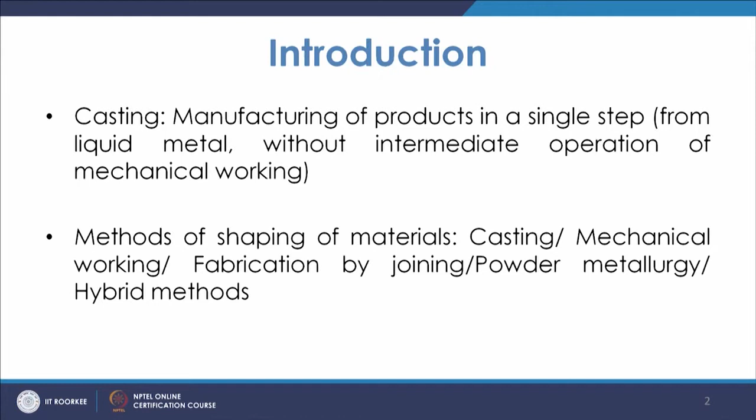So coming to the definition of casting: basically casting is defined as the manufacturing of products in a single step from liquid metal without intermediate operation of mechanical working. So let us see why casting is so much important.

There are many kinds of shaping methods of materials available. Why is shaping required? As we know, as an engineer we are required to exploit the available raw material of nature which nature has supplied to us. We are going to exploit these raw materials and get something in a form which is going to satisfy our needs.

That is the role of an engineer, and for that, as we know, we have different principles based on science and mathematics. So we use those principles, we have other resources, and based on that we shape the material.

Most of the natural materials we have in terms of reserves, we have mineral deposits. We take these mineral deposits, but they cannot be used directly. As you know, all the items are buried, and they are in certain other forms, so they are to be extracted. You have to extract from it the material which you need.

So that is how you extract the metal. You have the iron ore, you extract and process it to get the pure iron. Once you have the iron ore and convert it to iron, during the conversion you will have to see that you can shape it.

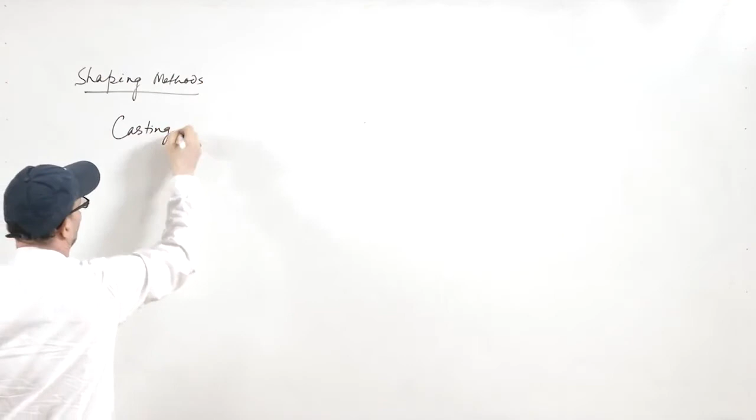We have discussed this a little, but as we know, in casting you have the cavity which is to be filled by the liquid metal. Once this liquid metal in the cavity gets solidified, because energy was given to convert it from solid to liquid state, and then that energy is extracted, it goes back into its solid state. So directly you get the final product.

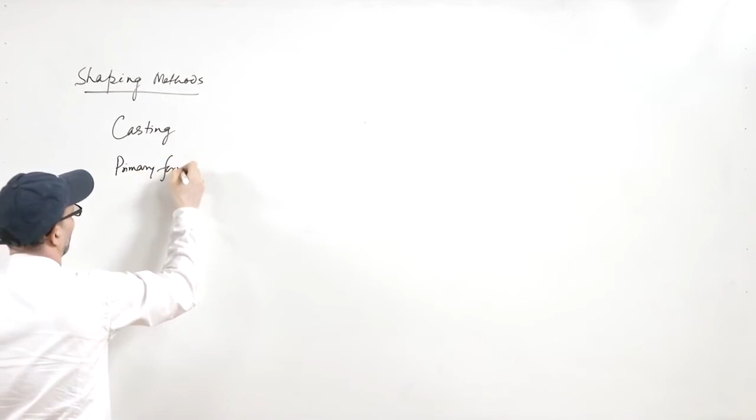Now other methods, like primary forming processes, or forming processes, mechanical working, primary or secondary forming. In that, what we do is apply pressure or force to deform the object. For that you need an object, and that object must have a certain shape, so you may have any object in any shape.

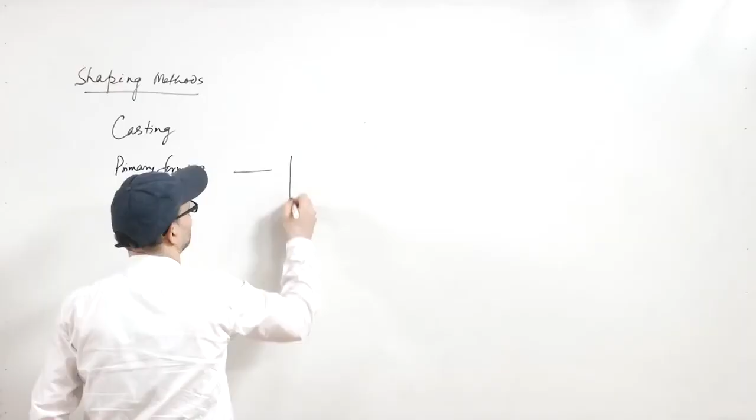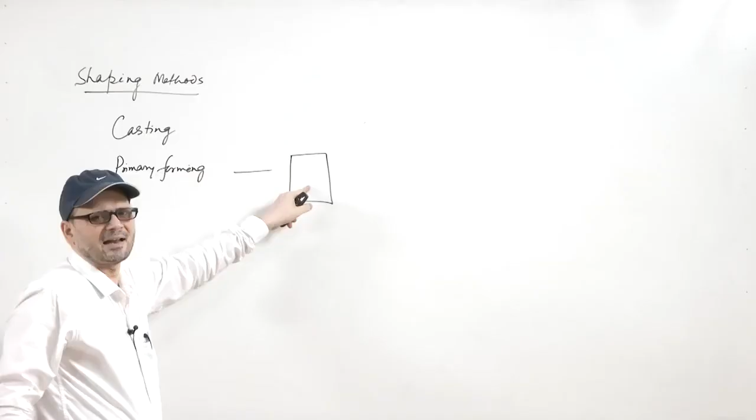Now, this shape you can't get as per your will, so you will have to make it, and that you make by casting. So once you cast, you bring that stock material and go for further forming it. You can form it and make it into this shape.

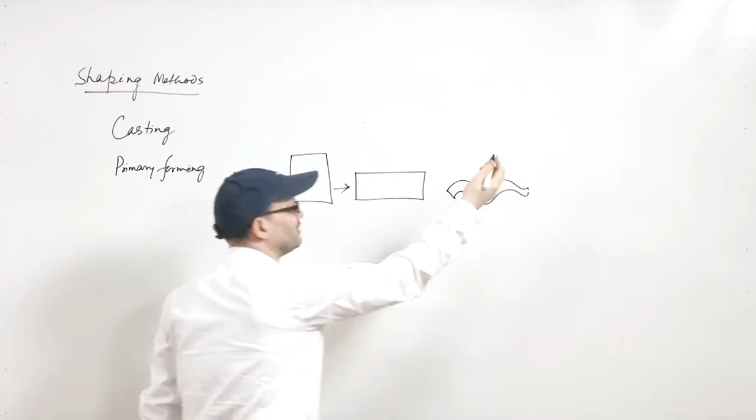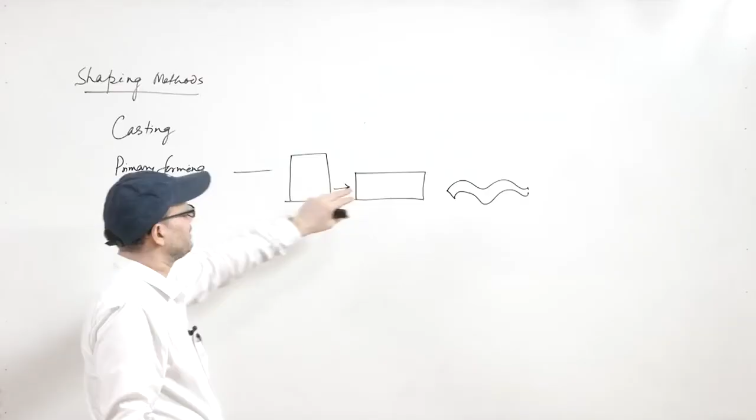You can have different kinds of dies, different kinds of rolls, and you can apply pressure on it to make any shape of material. So depending upon the type of forces applied and the type of equipment used, you can have different kinds of products - flat products, hollow products, bars, wires, all that. That comes under forming, primary or secondary forming processes.

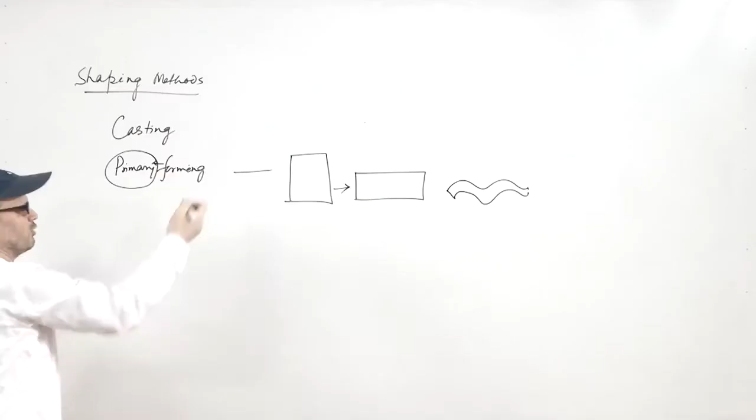So you can have it as the forming processes basically, or mechanical working processes. Then comes fabrication or joining.

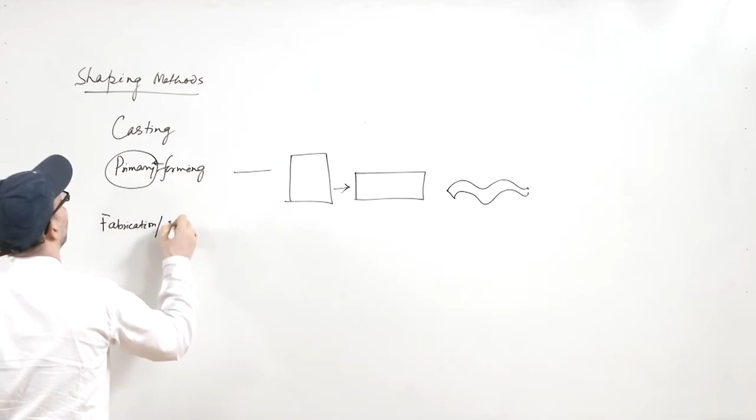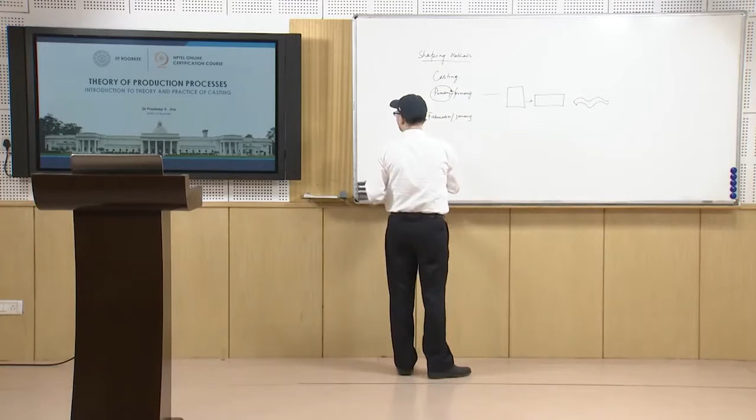Now fabrication or joining is also a method of fabrication, fabrication by joining basically. Normally whenever we talk about the fabrication term, we commonly refer to joining. Now, joining is, as we know, that you have to join the components - you have two components and a certain part is to be joined.

Now these things are required when you feel that the whole component cannot be manufactured in a single run. Although there are different methods of joining, just like in forming you require a stock, similarly in welding or joining also you need a stock or material in a certain shape which is to be joined. For that you need some cast unit or some forged unit, so ultimately you need a material which is to be cast. Then comes powder metallurgy.

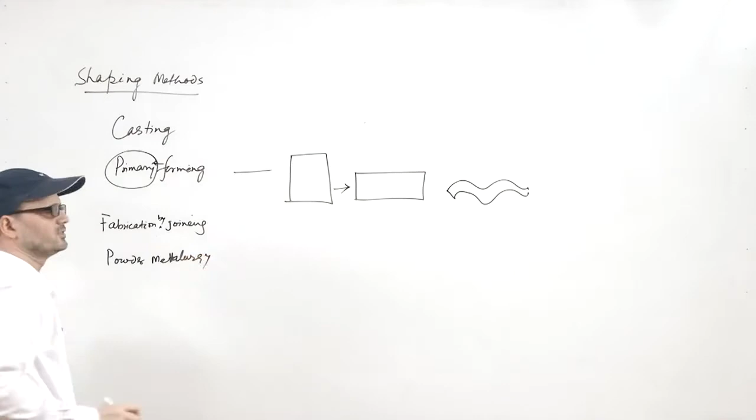Now, powder metallurgy is a new method, or a good method, where you use these powders. Powders of different materials can be used. Because of the requirements of varied nature, nowadays many times the material should have many types of properties. We should have good lubricating properties, very good porosity, and good strength.

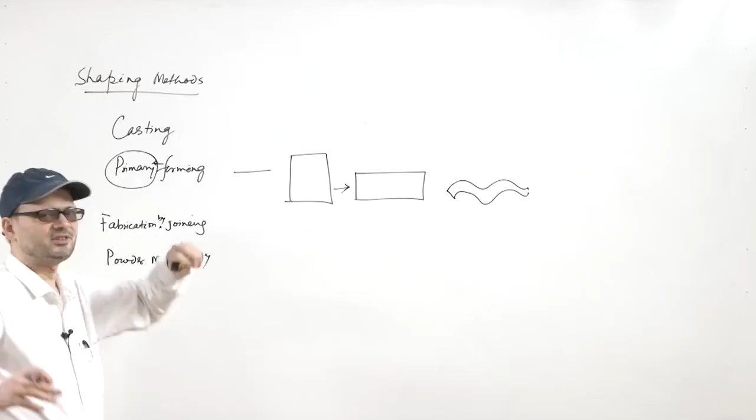So all these properties. Now, in casting basically you are melting the material first. While melting, you will have to see that the materials being melted are normally of comparable melting points, but many times they should also have the gelling tendency with each other, they should mix with each other at the microstructure level.

Many times that is not possible. You may think of having a material where you should have metal as well as ceramics. That is not possible when you melt. When you melt, the ceramics will be different, and the casting itself will be difficult, because once you cast you cannot ensure the homogeneity of these ceramic particles throughout the container or the mold. So these are the challenges which are to be faced.

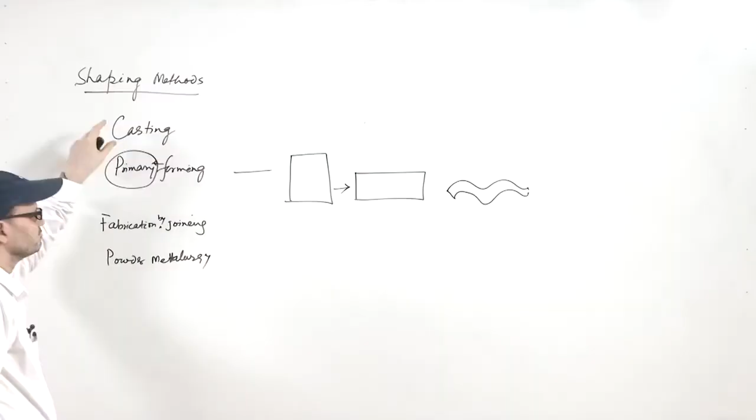These challenges are taken care of by adopting the process of powder metallurgy, where you have the powders of different materials, you mix the powder, blend them properly, and then go for heating it. You do not go to the melting stage, but before that you come to the sintering stage, use pressure and then compact it, so that a bond develops between the particles or materials. This way you get the powder metallurgy products.

So this is one new method which is used, but it has the limitation that you have size limitations. You cannot make very large size products, because you need the compaction, you need powder, and for that you need a die, keeping the lubrication and all that in mind. All this is a challenge, so very large size products cannot be made by powder metallurgy.

Then you have the hybrid methods, which are a mixture of these methods. You can have different kinds of non-conventional methods by which you can shape material. Apart from that, if you try to classify further, you have additive type manufacturing methods and subtractive type manufacturing methods.

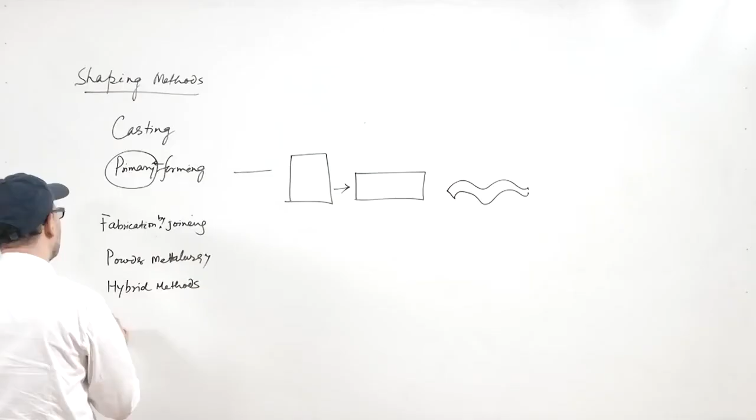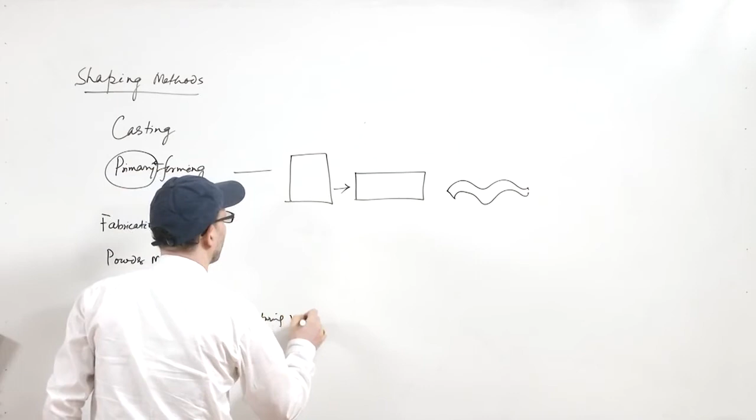Like you go for machining. So if you have a product and a certain part is to be removed from it, you use a machine for removing this material. This way you are bringing the material into a certain shape by removing material, that is why it is called subtractive type. Further, you have formative type, where you apply forming pressure and get the material into a certain shape.

Then you have joining methods and other non-conventional methods or so. This is how the different shaping methods are there, and casting is basically one of the most important of these processes, because it does not have any intermediate step required. If you look at other methods, you have many intermediate steps required in many cases.

Like if you go to forming, in most cases it does not happen in one go. You have to form, and there is a limit up to which degree you can form it in one pass. So in one pass you have a certain deformation ratio, and further you go, you have to heat in between. Like that you can have many, 20 to 30, many times.

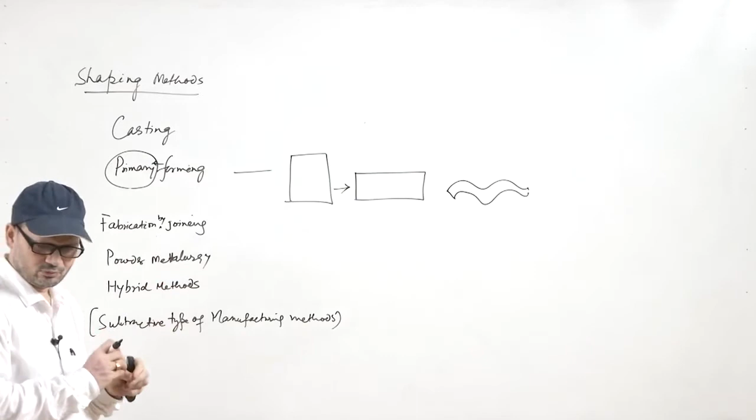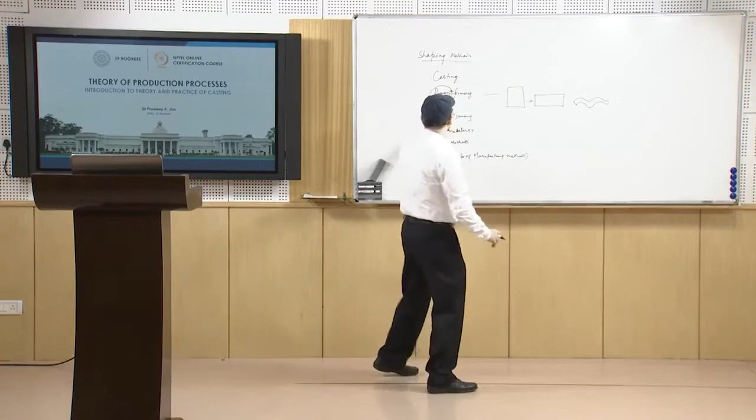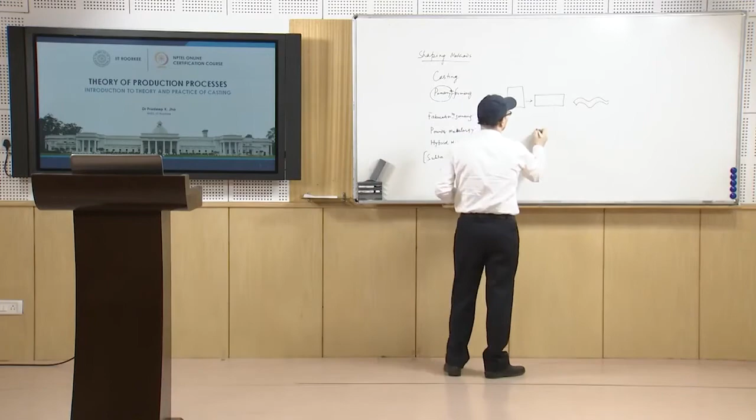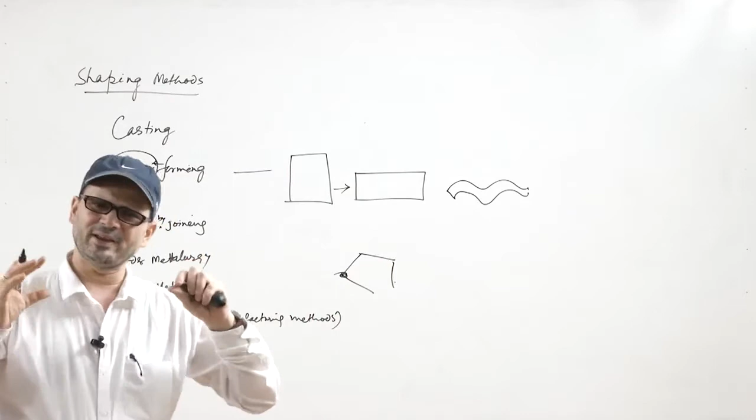So you cannot get the product in one go. Similarly, in joining also you may have different passes you have to go through, and you have to get further work done initially, then see that the passes are right. For getting that shape you need many controls, and maybe you have to attach at different places, put in a different setup, and weld at a different position. So if you have to weld at 3 places, here, here and here, first you have to do welding here, then here, or else you have to put 2 or 3 machines. So it means you cannot get the product in one go.

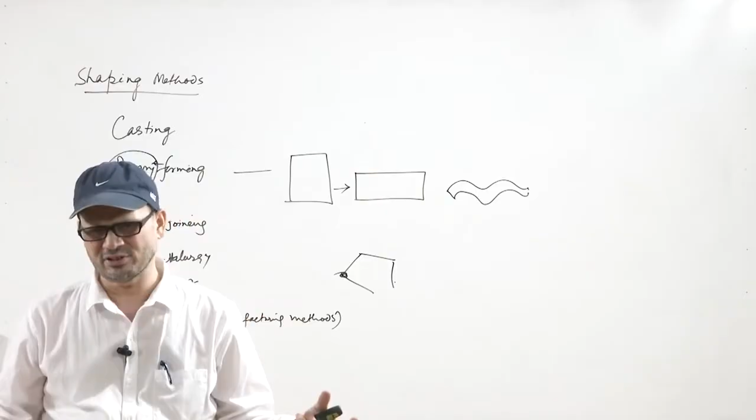Similarly, in powder metallurgy you have different stages. First you have the powders of different materials, you have to blend them, then mix and properly see that porosity is not there, mixing is proper, then porosity is removed, further compaction is there, heating, sintering, all that. So there are many stages, and then you get the product.

Similarly, in machining also, you have to machine many times, and you cannot machine large quantity of material at once because there is a limit to how much material can be removed. So what we see is, out of all these methods, casting is the one where you get the material in one go itself. What are the major characteristics of the casting process?

Now let us discuss the advantages of the casting process. First, the weight range. As you know, in casting the advantage is that you can get very large size products. Whenever you require very large frame material, you can have that. So the weight range is from very small, a few grams or so, to large products.

Products like turbine setups, and very heavy casting industries are there, like HEC Ranchi, BHEL, SAIL. So like that you have many industries which have large foundries.

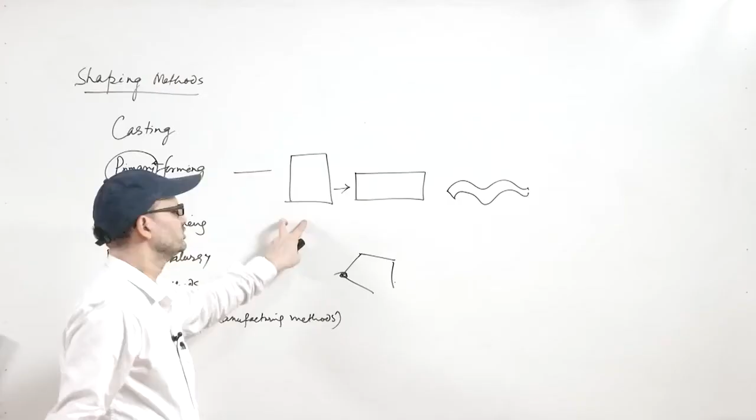Material composition: this tells that you have materials of different compositions, meaning any material can be cast, as long as the composition of materials basically matches. You bring these materials, put them in the oven and furnace, melt them, and get the cast product. So any composition, varying composition of materials, can be cast. Tooling cost is normally less.

You don't require very sophisticated tooling in the case of casting. Even in normal foundries, casting takes place either in semi-automatic foundries, done manually, or in automated foundries, depending upon the requirements. Even if there is a one-off order for some unit, it is only possible by casting. So it is advantageous to get it by casting, because the labor requirement is not required to be very skillful unless otherwise specified. This is the advantage in case of casting.

You have the cast structure; normally you say that you have uniform properties in the cast unit. So that way you get a good structure, and if you control the processes you can have a defect-free cast unit. You have the flexibility of the process available with you, which makes the process even more versatile. Further, you have design versatility, you can have different kinds of designs. So these are basically the characteristics of a casting process.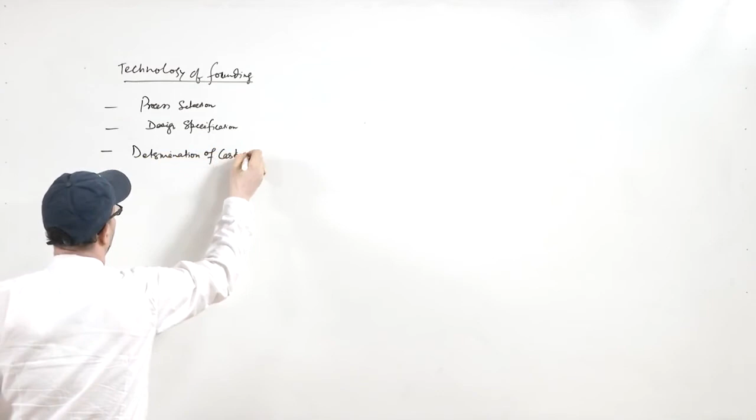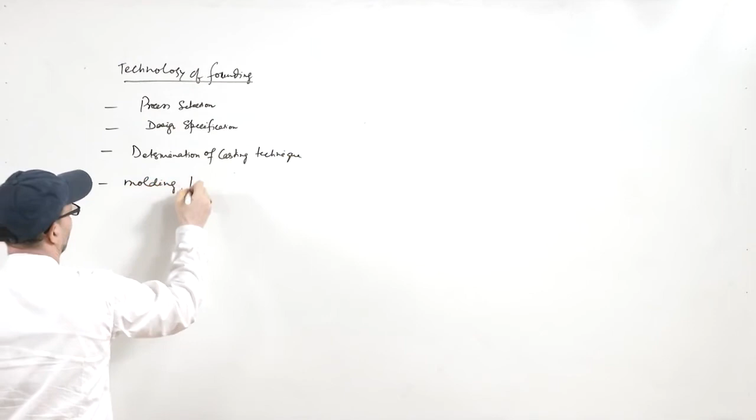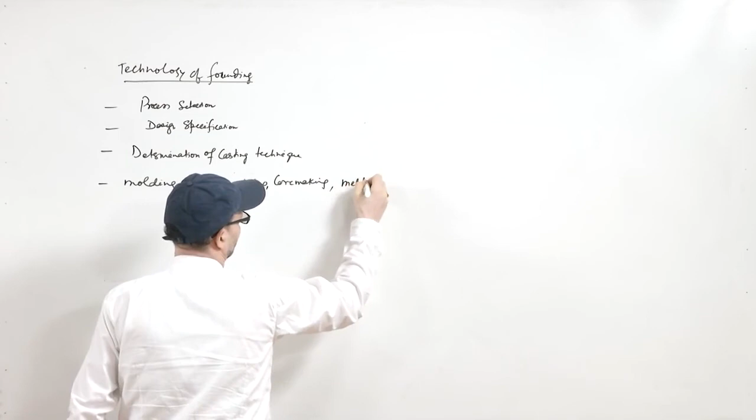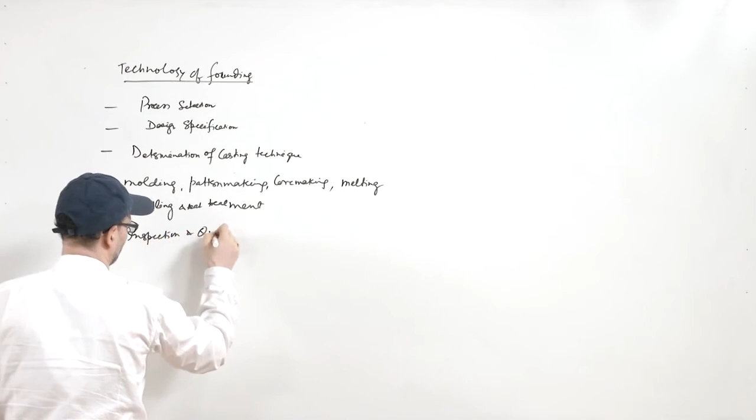So if you talk about the typical founding processes, in the technology of founding or casting, what you see is initially you have some design in mind. So you have the process selection, design specification, determination of casting technique, then you have molding, pattern making, core making. Then once you have the melting units, after that you have the product ready, then you go for fettling and heat treatment, inspection, and quality control. So this is how you get the cast product.

Now what happens in the case of casting is that first of all you have to have in design what you have to cast. Then you have to see what kind of requirement you have, what kind of accuracy you need, what kind of surface finish you need. That basically tells you which kind of process you are going to use, whether you need a process where the surface finish is given very high quality.

So accordingly you have to take that process. You may think of going for die casting where you use the metallic mold, or you may go for sand casting where you use sand as the molding material. Certainly when you go for die casting, the surface finish will be better as compared to sand casting. But if the requirement is such that you need to have the product at a lower cost, and you do not have to go for a very large number of units and the product size is larger, in those cases you go for the sand casting methods.

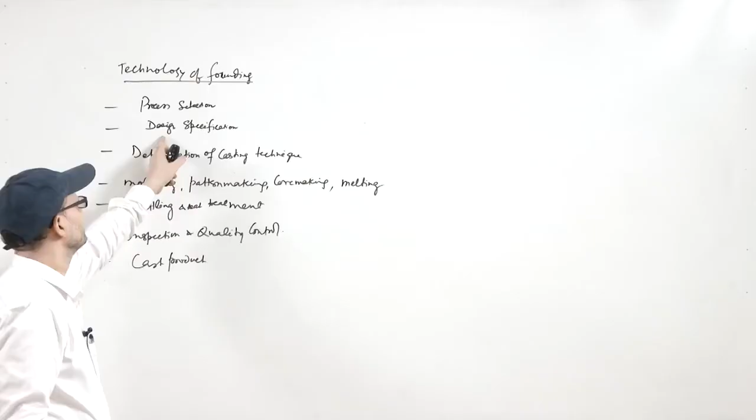Then comes the design specification. Based on that design, depending upon the intricacy or size, you have to decide the process selection. Then you have the casting technique. Ultimately that helps in discussing the casting process selection, which talks about the molding methods, the pattern making, the core making, and then there is a separate section for the melting unit.

So basically you have a section which talks about making the molds, the cavity into which the molten metal is to be poured. For that you need a pattern, so there will be a section known as pattern making. This pattern may be made of wood or metal or so. In that section, designers will make the patterns giving due allowances, and then that pattern is brought to the molding section to make the mold.

You will have a separate core making section, so that they make the cores, so that if the casting requires hollow projections or cavities, you need a core making section. Once your mold is ready, you need to put the liquid metal into the cavity. For that you have a melting unit where you have furnaces available, so you melt the material and then pour it in.

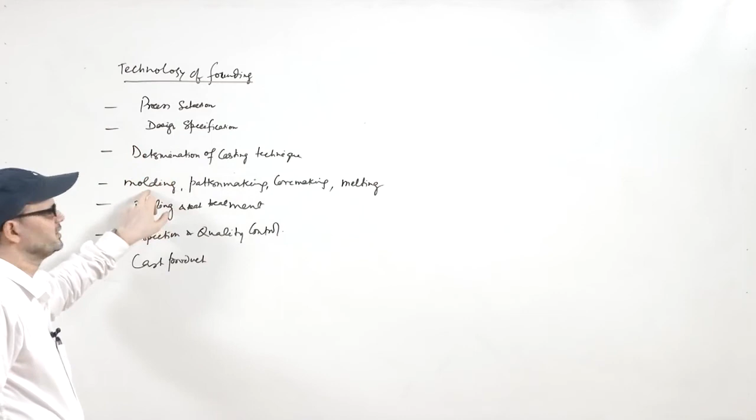Now, in the coming weeks we will discuss topics like molding methods, how pattern making is done, how core making is done, what the melting units are, and also methods like fettling and heat treatment.

Now let us see something about the history of casting. As you know, casting has been practiced since long ago. Axe heads of copper were cast in open molds, reported about 5,000 years ago. Earlier there were no such furnaces available, so people used pits. The process was to melt the material, put it in a pit, and get it into a certain shape. This has a very large history and was a widely practiced method of shaping material into certain forms.

Even in the pre-Christian era, bronze statues were produced using two-piece and even cored molds. A kind of investment casting process has also been reported from the pre-Christian eras. By the end of the medieval period, decorated bronze castings were used in domestic life, and the use of cast iron was also reported.

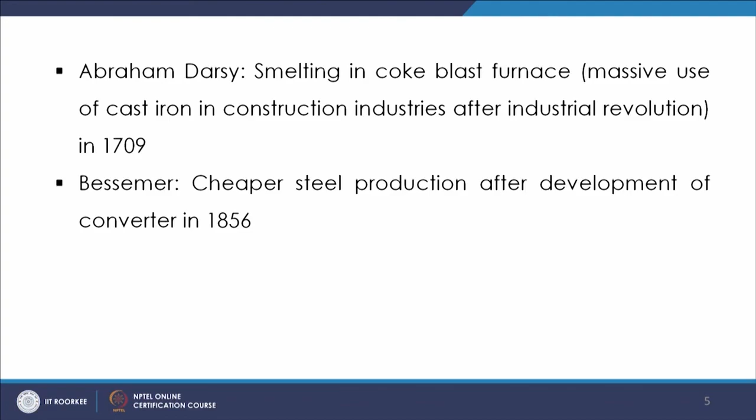From there, more and more good work started in the area of casting, typically in cast iron. Another very famous name is Abraham Darby. From his time, smelting in the coke blast furnace started. This began in the period after the Industrial Revolution, when large amounts of cast iron were used in the construction industries. That was in the year 1709.

Then another important revolution occurred with the use of cheaper steel production through the development of the Bessemer converter in 1856. Once steel came, it revolutionized the whole story, since steel has very good qualities. A lot of this work was done after some tragic incidents of failure of cast iron bridges.

Once steel came, as we see now, every day there is development of these processes, with newer and newer materials coming. We now talk about different kinds of improvement in quality and productivity, how to make cheaper products at cheaper rates with good, tailor-made properties. So casting process is gaining momentum, it will continue to gain momentum, and it will be useful for the development of mankind.